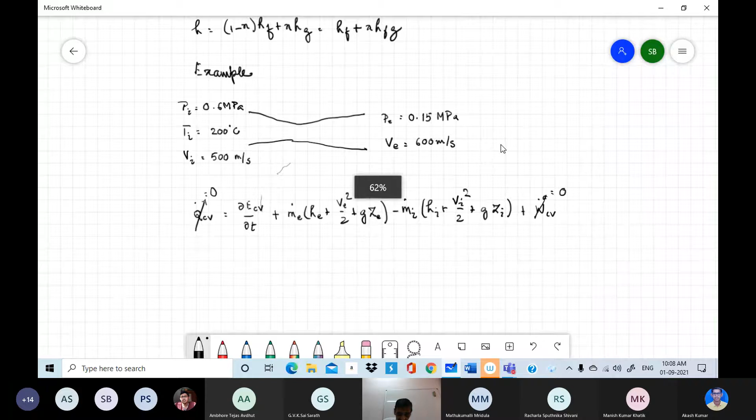Now, assuming that this is operating at steady state, whatever the material properties at any point inside the control volume - so my control volume could be something like this - at any point inside the control volume, the properties remain the same. So if I integrate energy over the control volume, that does not change with time. So therefore this also equals 0.

Now I assume that the nozzle is placed horizontally, so therefore ZE and ZI are the same.

Now for mass conservation, ME dot must be equal to MI dot. If it were not, there would be accumulation of mass inside the control volume. Since it's at steady state, there's no accumulation of mass. Mass density also must remain constant at any point in the control volume with time.

So then if I write down mass conservation law, then that would be...

So then for a system, mass must remain constant. Since this is at steady state, this must be 0. So this implies, since we have only one inlet and one exit, ME dot equals MI dot.

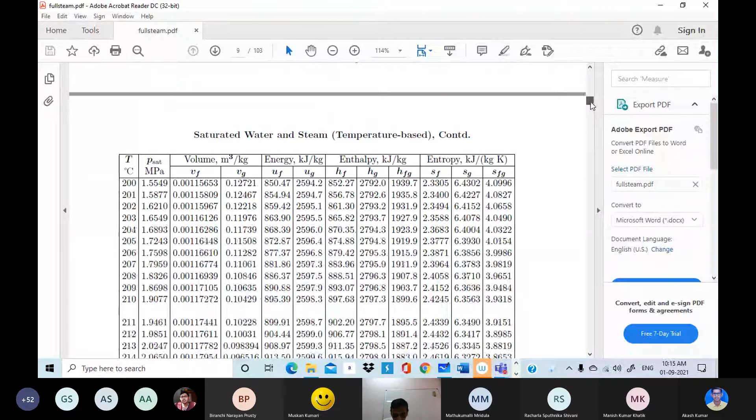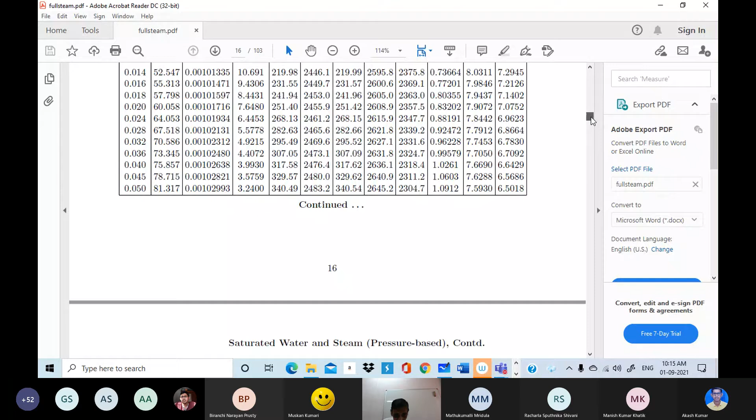We have done this before, but since we had not used the enthalpy column in the past, let's do it once again. So 0.6 megapascal and 200 degrees centigrade. Looking at the pressure table, this is the saturation temperature base - this is the saturation line, with pressure as the base. At 0.6 megapascal, the saturation temperature is 158, and we are given the temperature of steam as 200 degrees, which means it is superheated. So let's go to the superheated part of the table.

At 0.6 megapascal, scrolling down, let's come to 200. Now the columns were V, U, H and S. S we still don't know what it is. H is the last but one column - that is what we need to see. So for 200 it is 2850.6.

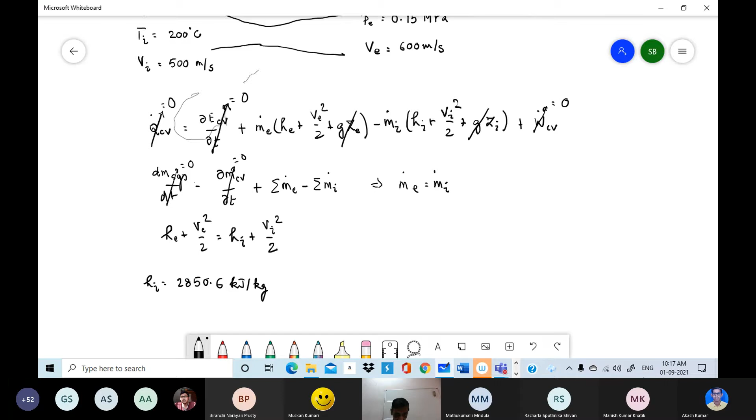So H was in kilojoule per kg. Just confirming.

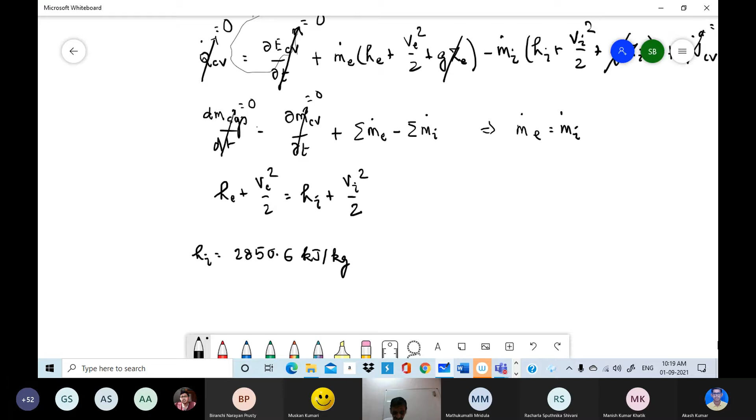Now here you have to remember one thing: kilojoule per kg is the unit for H, and for V it is meter square per second square. So how are the two related?

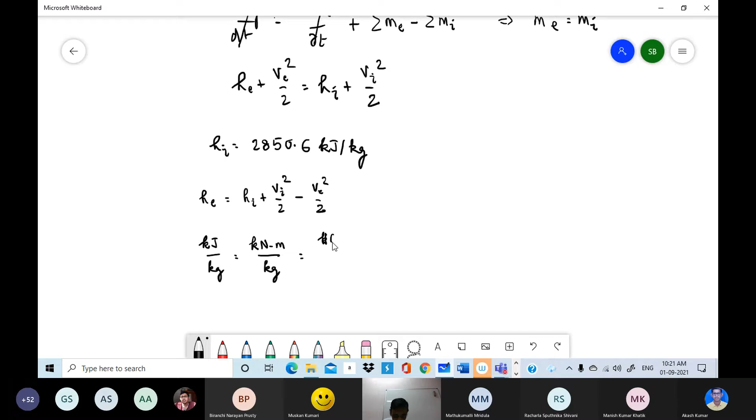Kilojoule per kg is equal to kilonewton meter per kg. A kilonewton is 10 to the power 3 kg meter per second square, per kg, because 1 Newton is 1 kg meter per second square. So 1 kilonewton is this. So 1 kilojoule per kg is not the same as meter square per second square. So if you put in just numbers, you can't add them because the units are different.

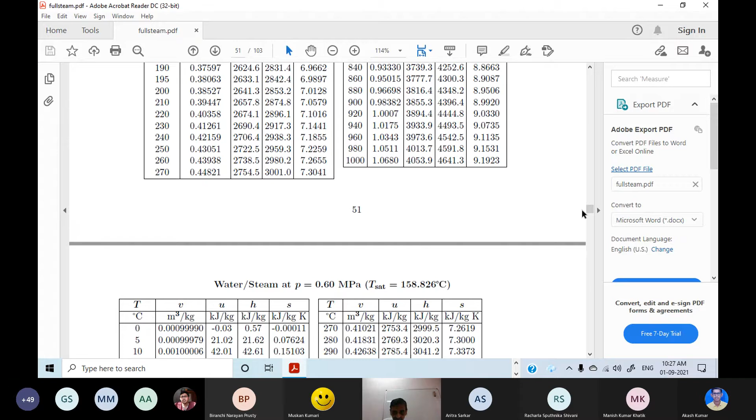So once again, going back and comparing, this time we know the pressure is 0.15 megapascal. So let's go to the portion where it is 0.15. So this is the table for 0.15. At saturation, enthalpy is 2693.1, and our enthalpy is 2671.

That means the enthalpy is less than the enthalpy of pure saturated steam, that is steam with quality 1. So if we heat it further, the enthalpy would increase, so it won't match the enthalpy which we have calculated. Therefore, it must be saturated steam, so then we have to look up the saturated steam properties.

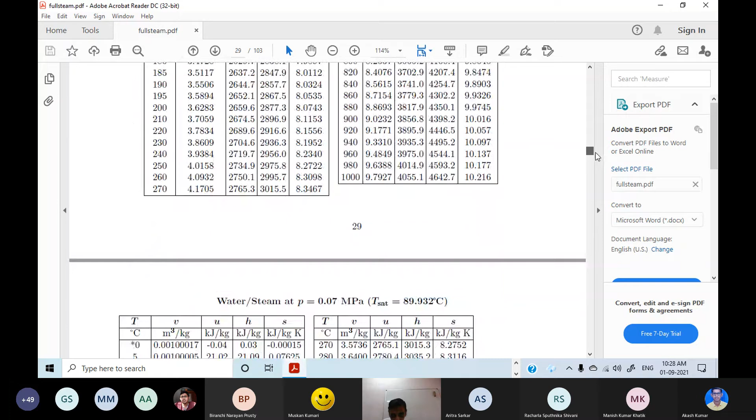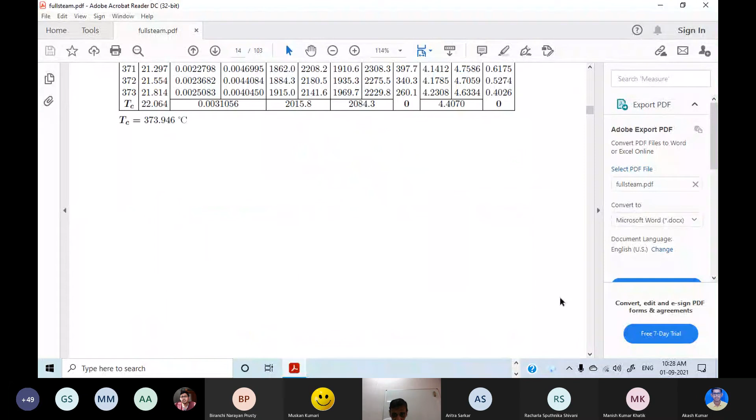Saturated steam at 0.15. So the enthalpy values are given here: 467.13 for liquid and 2693.1 for vapor. We are also given the enthalpy of vaporization, so that should make our task simpler.

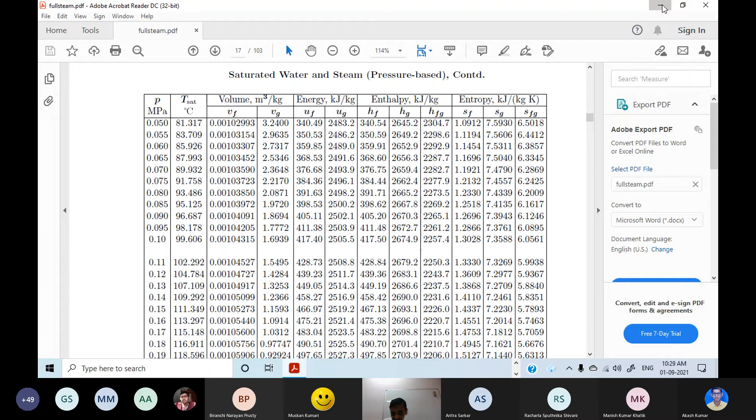So then for liquid it is 467.13, and the vaporization enthalpy is 2226.0. So then this would be equal to HF plus X times...

So this gives us our answer that at the exit, steam is saturated vapor with quality 0.99.

Let's do one more problem. This one didn't have a W.CV - that was the question one of you asked. So let's do a problem which has a W.CV. The mass flow rate into a steam turbine is 1.5 kg per second and the heat transfer from the turbine is 8.5 kilowatt. The following data are known for steam entering and leaving the turbine. Inlet condition: pressure 2 megapascal, temperature 350 degrees, velocity 50 meters per second, elevation above reference plane 6 meters. Exit conditions: 0.1 megapascal pressure, quality 100%, velocity 100 meters per second, elevation above reference plane 3 meters.

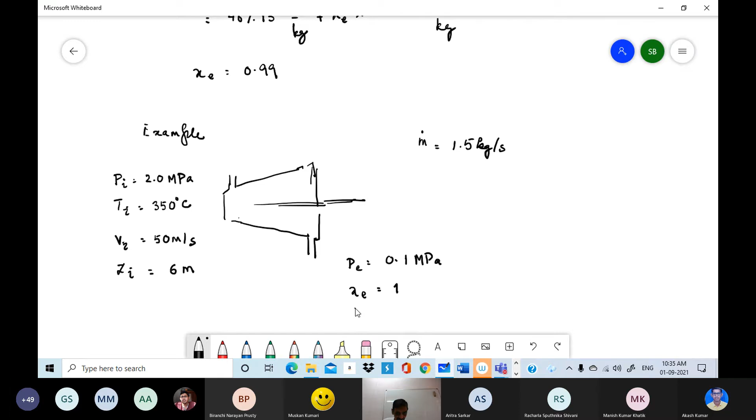Okay, first thing is, again assuming that it's operating in steady state, ME dot must be equal to MI dot, which is M dot, that is given as 1.5 kg per second, and at the inlet... at the exit... the value of acceleration due to gravity is also given here.

So, given a pressure of 2 megapascal and a temperature of 350 degrees centigrade, we again have to go and look up those tables. I'm not doing that once again, I'm taking the final value. So we have done this exercise, you know how to do it. So given the pressure and the temperature, we can find out what is H.

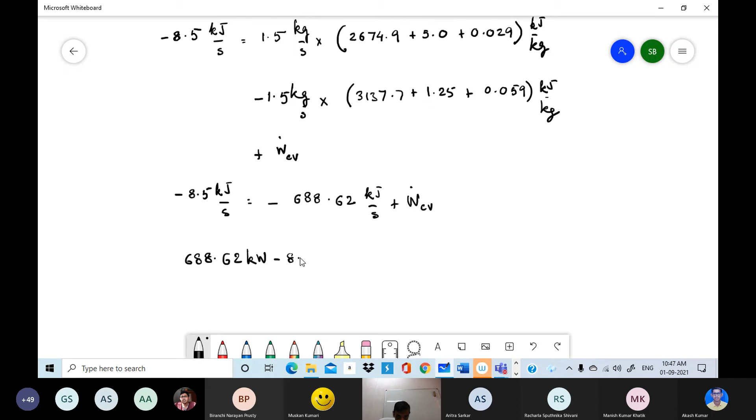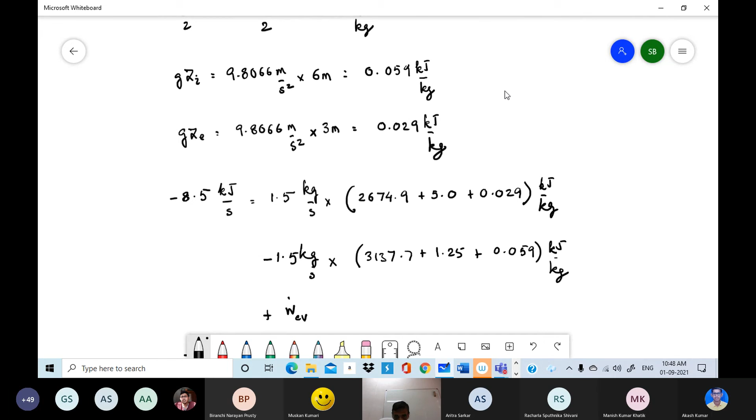So given all the data, we observe that this is the rate at which work output is obtained from the turbine. Now, if we look back, we were provided steam at 2 megapascal and 350 degrees centigrade. Now, depending on how much steam we are supplying and what is the diameter of the pipe, that will determine the velocity. Wherever we place the turbine, that will determine the height.

Now I expand it to 0.1 megapascal, which is roughly 1 atmosphere. So I have steam at high temperature and high pressure, and I expand it to atmospheric pressure. Depending on the diameter of the pipe, that determines the velocity, and the elevation is wherever I put the exit.

Now the question is, we are told in this problem that at the exit it is saturated steam. Can I arbitrarily specify whether it will be saturated or superheated, or is there some means of determining this? In this problem, we are given pressure and temperature at inlet, and pressure and quality at exit. This is because so far we have covered only the first law, which permits us to do an energy balance provided we are given the state at inlet and at exit.

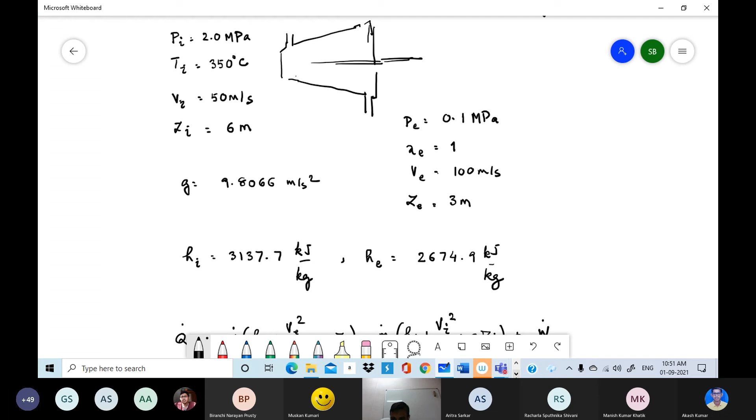Okay, now... Sir, are there any tutorial sheets for doing the questions?